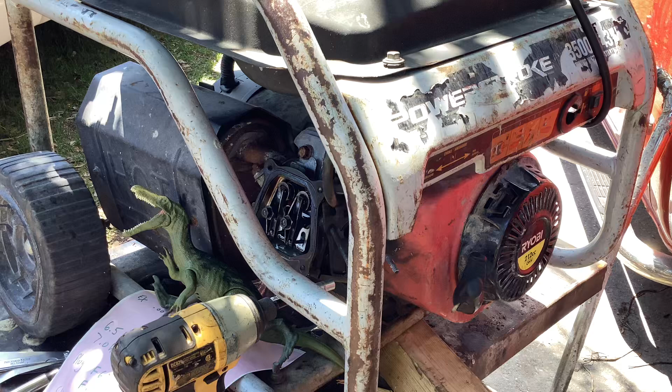Second edition on this PowerStroke 3500 watt generator. It's a Ryobi brand. It's got a 212cc overhead valve engine, and I'll talk about that. We did an initial video on this thing and I screwed it up. It was a Tommy screw up, and I'll explain. I'm sure some of you have caught it in the first video.

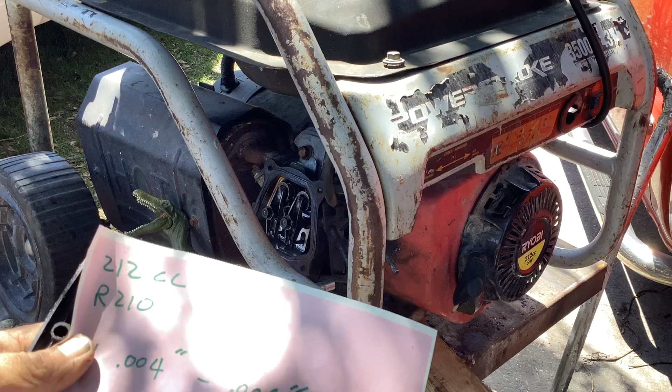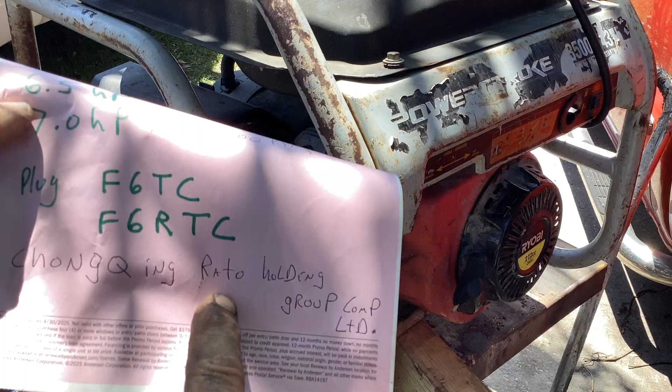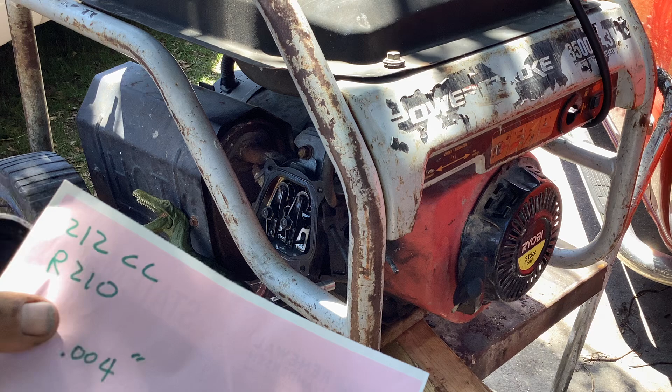So this happens to be, like I said, a 212cc. It's the Rato 210. And it's the Chongqing Rato Holding Company Limited. So they just abbreviate and call it the Rato. So this is the Rato 210. It's stamped on the other side of the engine, R210. So it's known as the Rato.

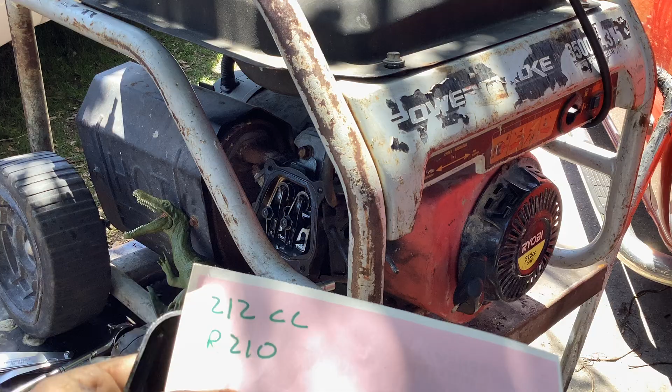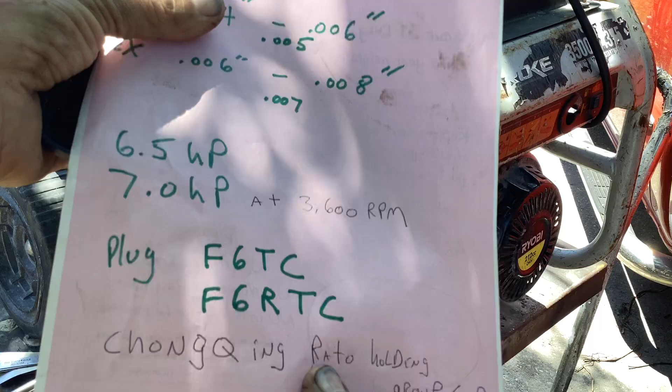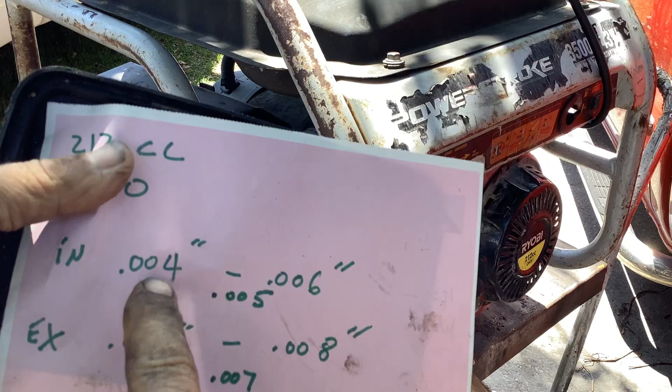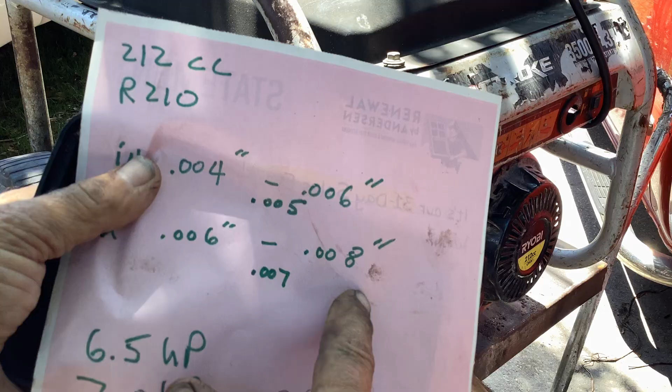So I was doing a little Google search. I went to Bob is the Oil Guy, and they were talking about the Predator 212 sold at Harbor Freight. They said that some of the engines had been Rato, some were Lifans, and others Loncins. So I just went to Google Predator 212cc to get intake and exhaust clearances. So intake was showing at 4 to 6 thousandths. I split it in the middle, I use 5 for intake. Same for exhaust. Between 6 and 8, I use 7.

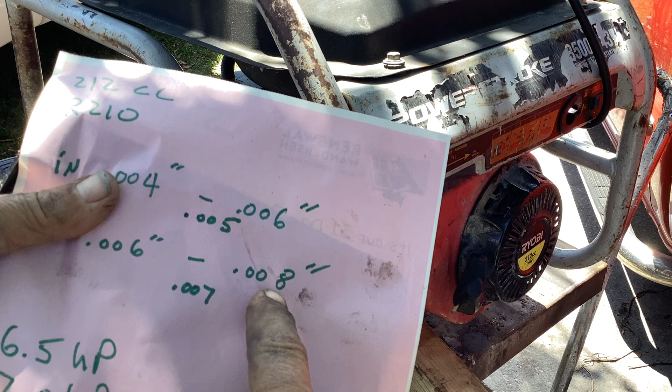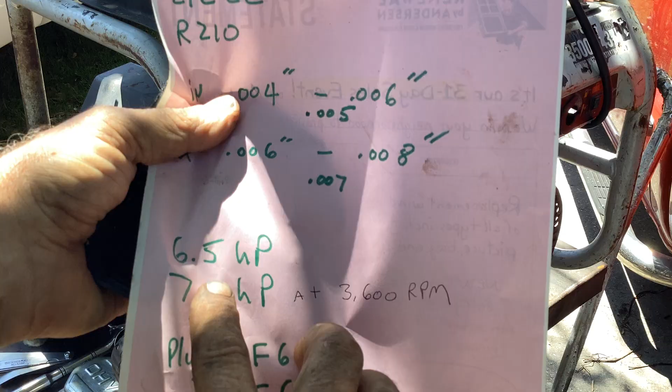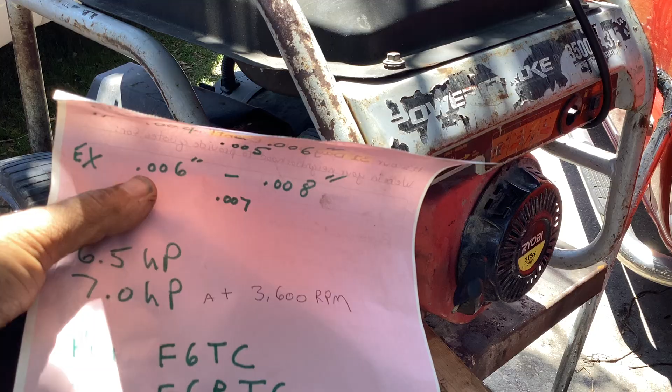So later on, I went to Ryobi and looked at their website. They're calling for 6 and 8. So I'm just a thousandth off of what their factory setting is. I don't think it's going to make a difference. They're calling it a 6.5, 7 horsepower at 3,600 RPM. And these are the plugs that'll fit this thing. I'll put those down below.

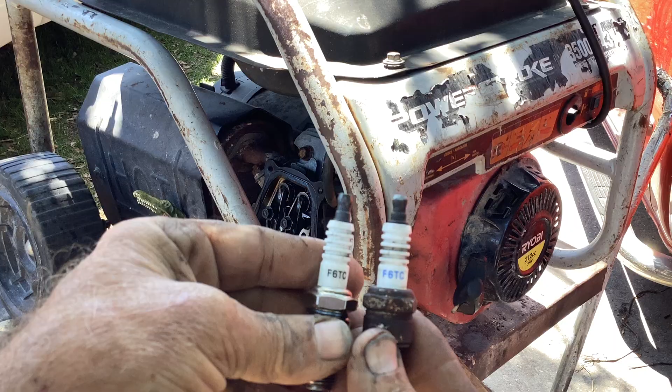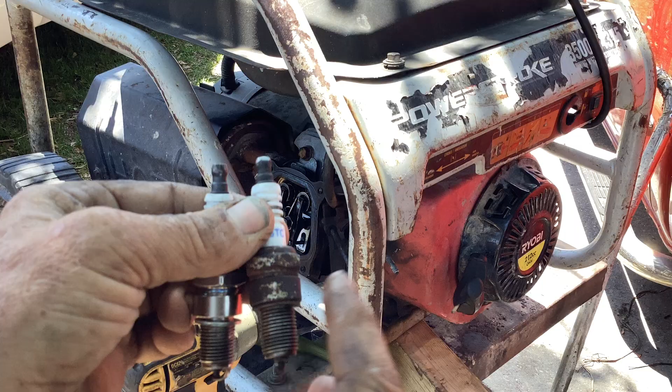So we had a 6 on here, and it was all goobered up. I found one in a carb kit, same exact thing, but it's not an NGK, it's a no-name F6TC. I think this was the original one. So we're gonna mess with that. What else am I gonna show you?

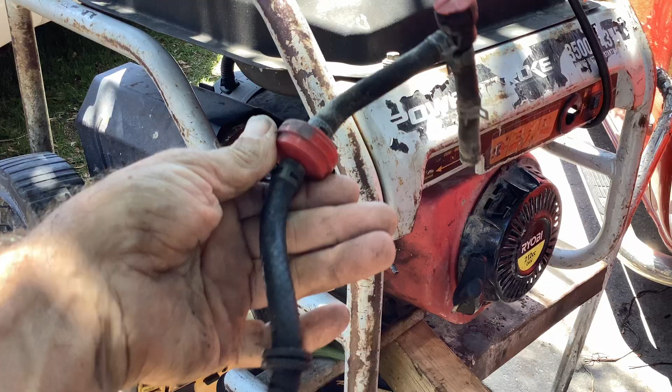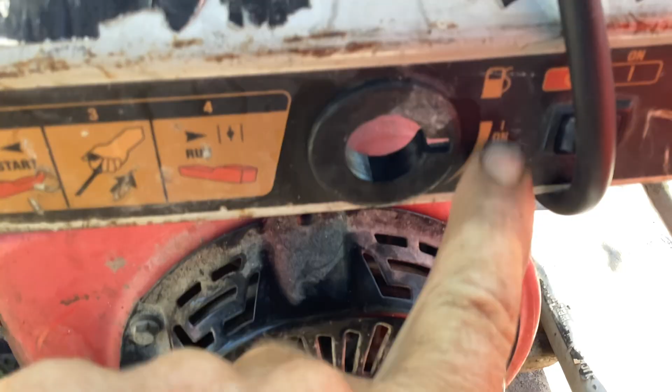Okay, I screwed up on the fuel selector. That was a big issue. That's why this thing would start and stall. It wasn't getting fuel. So I took off this whole apparatus when I was working on it. I snatched up a fuel line from a carb kit. This is going directly to the tank. So right here, they're saying straight across is on. But up here, I see on, and then I see a dash up and down. So that's a screw up on this PowerStroke. It's confusing to homeowners like me.

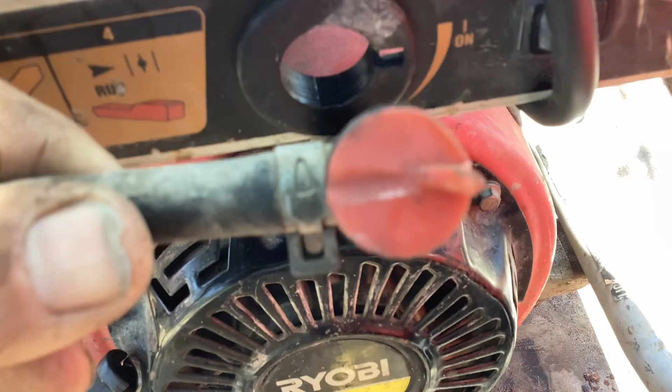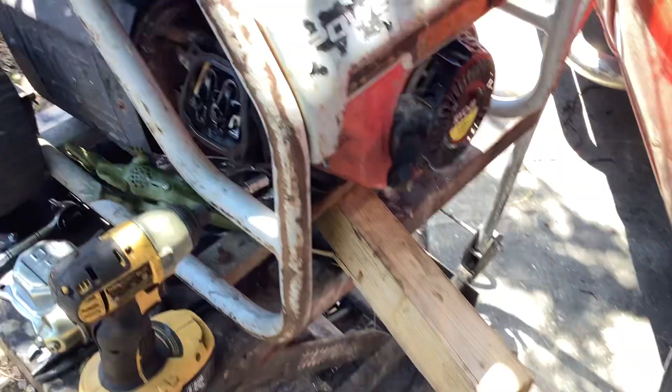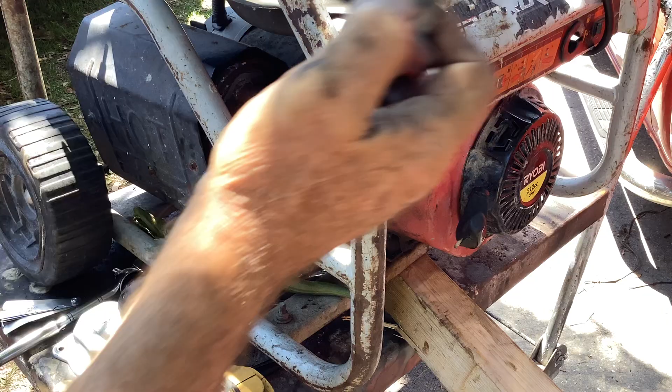So basically what I had done was I had it straight up and down, which was off. I was mimicking this. It should be straight across is on. So I did get fuel flow when I made the adjustment, but I took the carb off anyway because I had seen the white dust of death in the bowl. We're going to run a straight line when we mess with this thing, and then I'll deal with a shut-off valve. So where can I get you? What do we want to talk about? I guess we'll do the valve deal first.

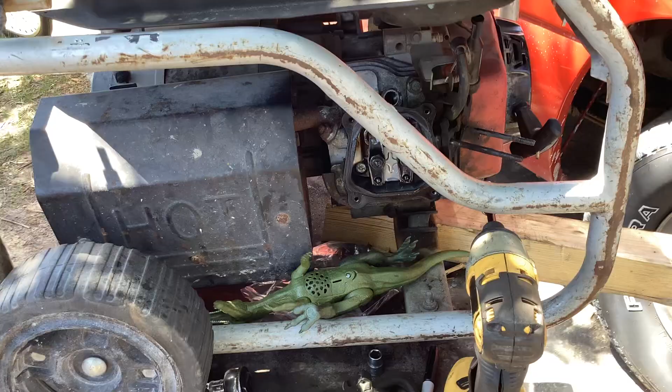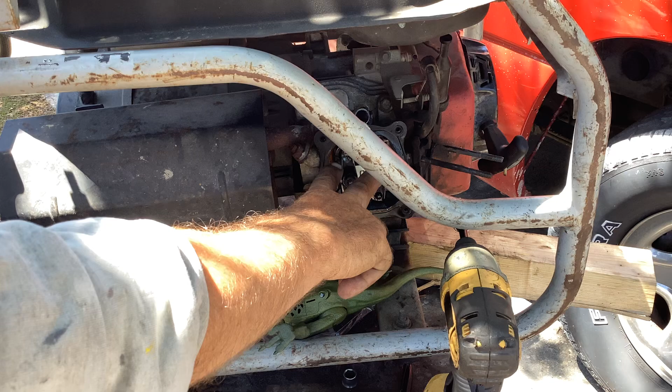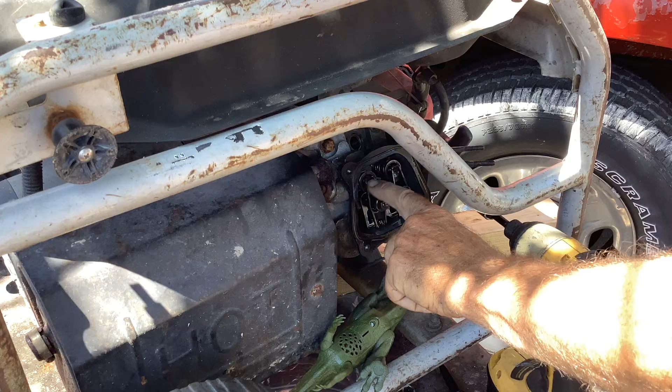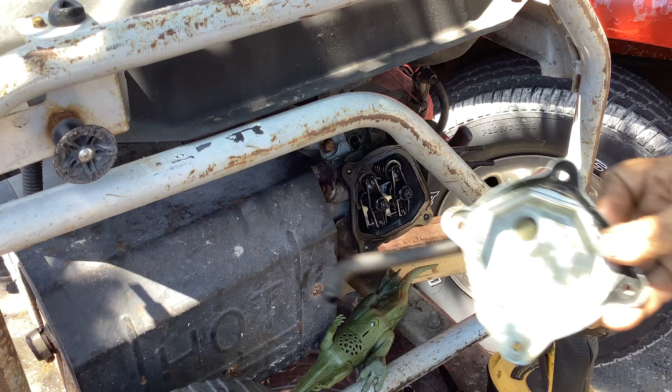So with the plug out, I stuck a small screwdriver in the plug hole and just kept pulling it until both valves were in the closed position. Did a 360, made sure these came full out, then took my intake and exhaust reading. They were both loose, valves were loose. This cover was probably never off. I ended up degreasing it. It was all crappy. Cleaned it all up. Air breather.

So I did that, 10 millimeter for the lock nut. I think it was 13 for the adjusting nut in the back. So we're good here. I'm going to put the valve cover back on and then the carb and lower this thing down.

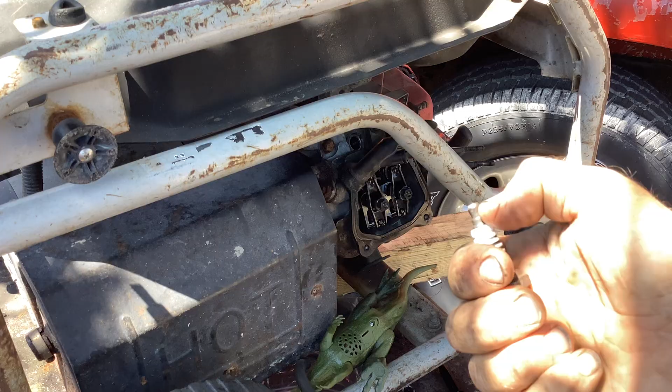So this thing, like I said, probably would have worked. I had the fuel off. So did you see any illumination in the floor lamp, the spotlight?

You guys were supposed to be working for me. I hope you weren't screwing off.

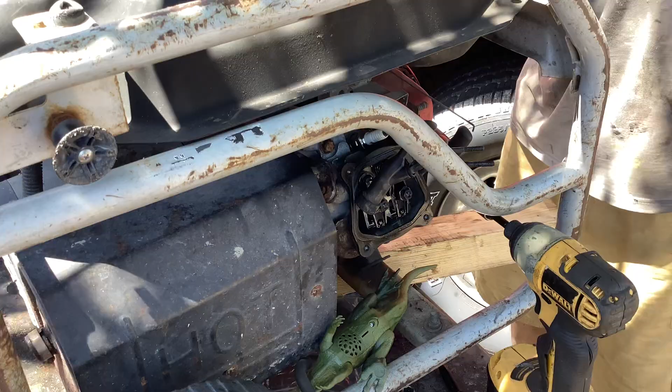Did this power head produce? Oh, that was a screw up. I had my ratchet holding up the fuel line. I just sprayed my driveway with gasolina.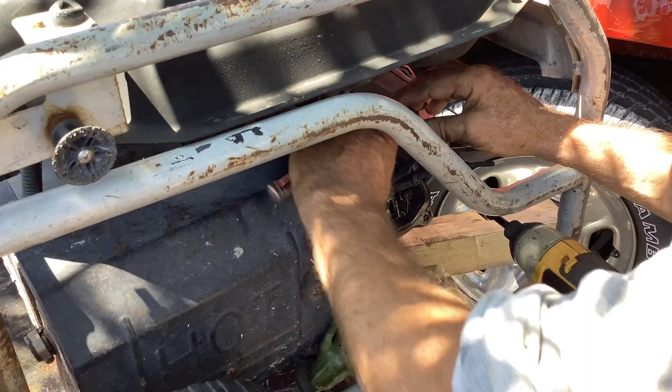So I think this thing can be fixed up for not too much money. I'm glad I only spent $10 on it, because with what I need to buy, it's going to put me up in price. It's really not clicking, but I think I ordered a 5-pack of these plug heads, wire heads here, so I can switch that out. Now, overhead valve.

I cleaned off the 4 screws. They're 8 millimeter. Those were all crappy with dirt. When I had the valve cover off, I tightened up the head bolts. There's 2 down here behind the cover and 2 you can reach from the top, and they were tight.

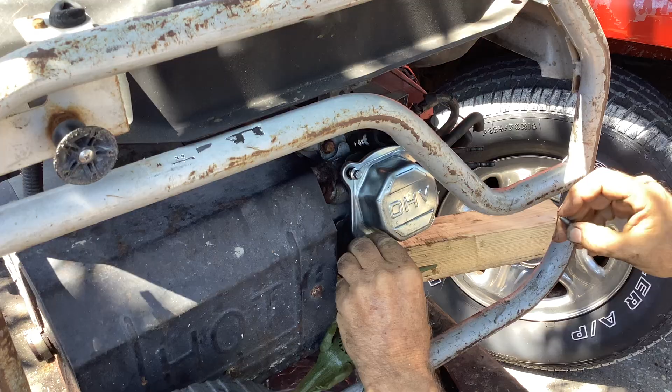What I'd like to do if it starts is pull the wire for the oil level sensor and see if it kills the engine. I think it's on the other side. It's a sensor that's going into the block. It may be oil level. I want to see if unplugging it does anything, or maybe it just affects it on startup. If there's no oil, it kills the coil.

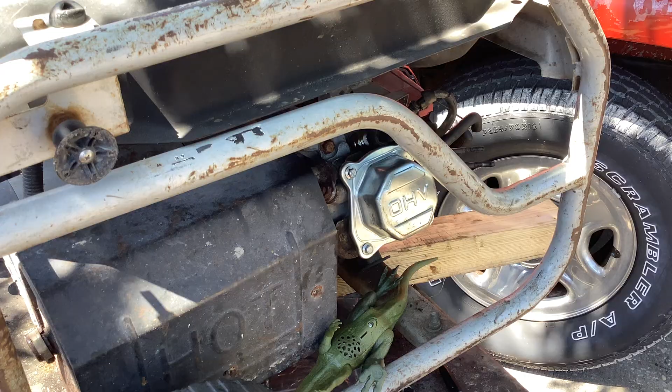Okay, I'm going to get them started and use the DeWalt. Okay, they all started. Yep. Okay, they're 8s, and I got an 8. Okay, I'm going to get an extension and just snug them up by hand.

How you guys doing? I probably shouldn't even be working on this thing, but I figured what the hey, might as well keep working, see what I can do.

Just crisscross applesauce. If we have any satisfaction with this, I'll do a better job at degreasing the engine. Okay, so that's on. We can talk about the carb. I ran it through the ultrasonic twice.

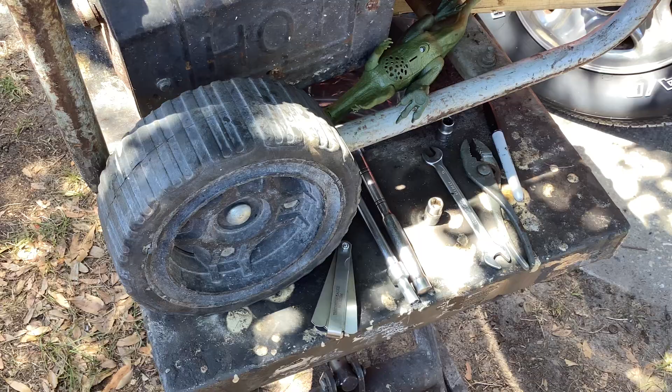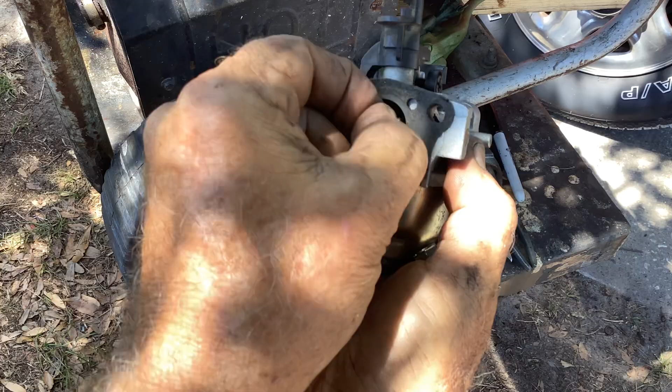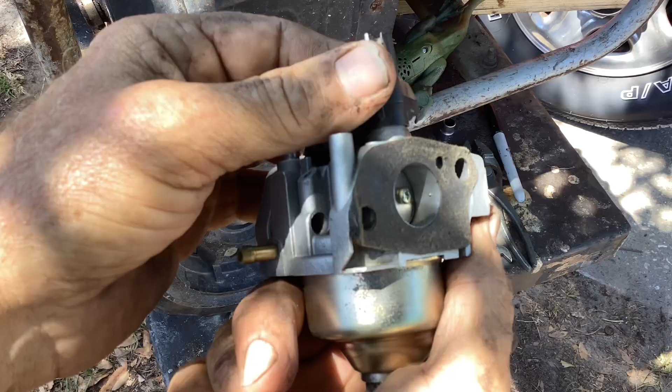So here on the throttle side, the brass shaft was so worn out, this whole wafer was dancing back and forth. So I kind of wrapped a wire around the brass shaft because it's kind of oblong right now, just from this thing running. What's this, a 2013? Running every day, it just wore out the brass shaft down there. I've never seen that. Something with so much use.

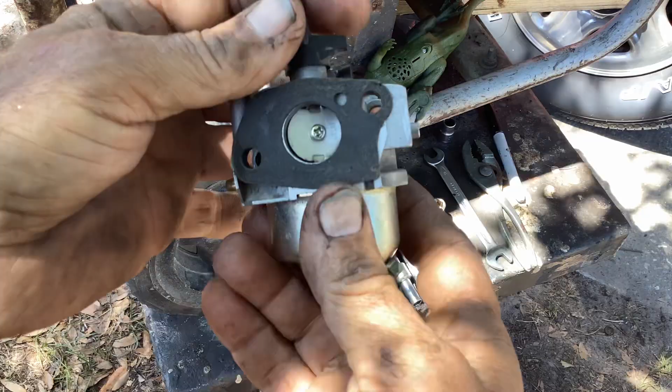In the aluminum throttle wafer, it's got sharp edges here from it touching the body of the carb. So really worn out. And the choke handle, that's worn out.

I looked on the Big Jungle, and you can get a carb for under $15, just the carb, no filter or lines or clamps or spark plugs. So 15 plus 10, what I paid for it, would be 25 for this. And I think I would go with another carb. This has just been worn. I'm sure it'll be okay to start, but I would want to change it out.

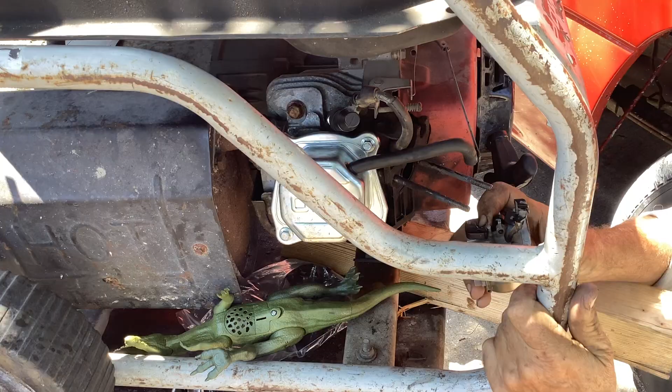My intention with this machine would not be to sell it. I would hold on to it, and if anybody needed it during hurricane season, this would be a loaner. I would show whoever I let use it how to run it, but make it where it would start. And I think with the funky choke, having a new carb would be something I should invest in. That would eliminate that problem, and then I have to get a fuel shut off here. Okay, let me keep going.

Okay. We need, oh, did it again. That's like the 5th time I've